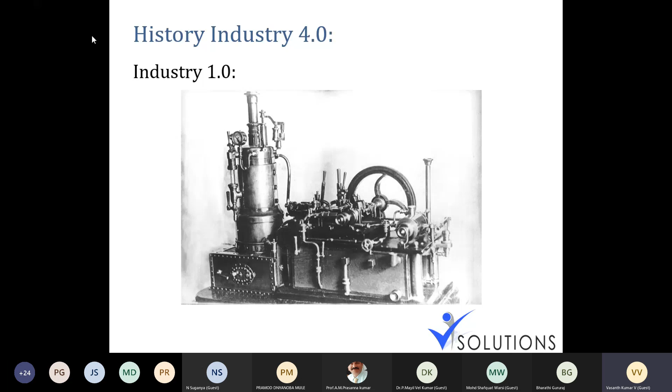That is where our trains came into picture, the coal-based trains. The salient feature of Industrial Revolution 1.0 was marked at the end of the 18th century. It gave the introduction to water and steam powered mechanical models. The highlight was the introduction of steam engine locomotives, the trains basically. Steam engine rails were laid, which helped us to transport items from one place to another.

So the circulation, exports, imports were able to happen. Imports and exports were not happening at a big level till this came into picture. This marked imports and exports happening at a global level. Then came Industrial Revolution 2.0.

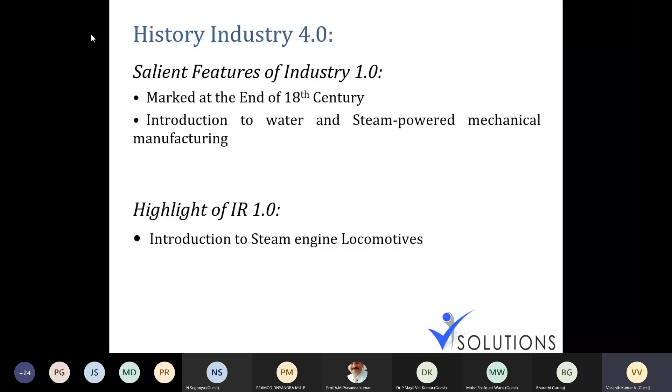This is more or less the same as Industrial Revolution 1.0, but people start doing this in mass production. That's a very important part, where you see the same mechanical models driven by thermal power or steam power or water power, but now n number of people started working on that, with n number of machines put over there. This is where stations came into picture.

There's something called stations when it comes to the production sector. A station is, let's say, you have 5 stations. One particular product, whatever is being designed, tested, or manufactured, will go through every station one by one. It goes through the conveyor belts. That's where conveyor belts also came into picture.

Electricity came into picture. In production, there was mobility of DUTs. DUT is nothing but device under test, or device under production usually. So the device under test started moving from one place to another, basically bringing mobility into the production sector itself.

If you've seen, for example, the olden Charlie Chaplin movies about the Industrial Revolution, you see that the products usually move from one place to another. It undergoes multiple stages of production.

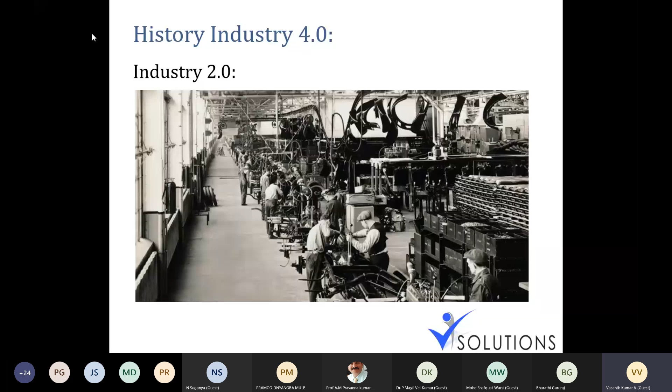The salient feature of Industrial Revolution 2.0 was marked in the 19th century, with the introduction of electricity, mass production, assembly line. Assembly line is nothing but where conveyor belts move the products from one place to another. Telegraph and mobility, as I told you.

And this was basically first introduced in the food production sector, where people in Europe had a very severe climate in the winter seasons. So what they do is preserve their food, like meat. They usually eat more meat.

So they wanted to move this meat from one place to another. When you preserve it, it undergoes a lot of process, so moving them from one place to another was a huge challenge for them. That's where they started doing assembly lines.

Then a gentleman named Henry Ford felt this was a very good idea. Why can't we start using it in automobiles? He carried this principle from the food production sector to the automobile production sector. That's the first time mass production happened in automobile or any manufacturing sector.

The highlight of Industrial Revolution 2.0 was the introduction of electric locomotives, like the normal trains running over cable. It draws power from the cable lying over the top of the rails, or your basic metro rails. In Chennai and Mumbai, it draws power from the overhead lines.

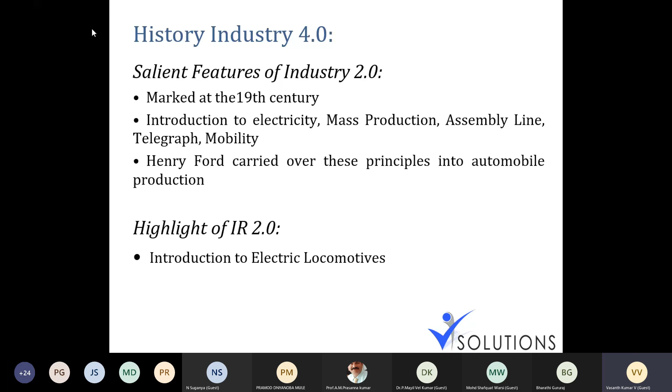Then came Industrial Revolution 3.0. This is where for the very first time people started avoiding people themselves, which means in the production sector they wanted everything done with a robot. That's a very important word, robot. When I say robot, it's nothing but a computer which is driven through software.

Till now no one was using software, it was all a mechanical model. If not, it was powered by human beings' energy or human effort. But for the very first time, software came into picture at Industrial Revolution 3.0.

Whatever you see here, I have a complete video of this image, I'll play that to you. Before that, I have some more things to show you. I'll show that and then come back and show you how it is happening.

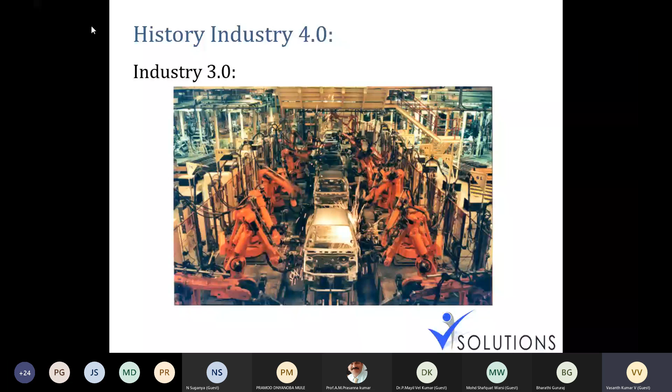This is actually from BMW's production area. The robot they use is from a company called KUKA, KUKA robots are the ones being used. I'll show a demonstration video also to you, I have that.

This was marked in the mid of the 1970s, mid of 20th century, and this is the first time we gave introduction to partial automation. Very important, partial automation. Many people don't know what partial automated or semi-automation means. I'm going to tell you about that.

This gave introduction to partial automation using memory programmable controls and computers, which means you have memories like IC. Basically some IC where you can deploy the program, it's a programmable control, and you can now do partial automation.

Coming back to what partial automation is: you can program your machine to do a set of things, to do that particular set of tasks again and again, but it will not do anything beyond that. It will have a set of codes already lying inside it through IC or some memory, and that particular set of codes will be repeated again and again.

What is fully automated is something that can also try to do something beyond its task, like trying to judge something, estimate something, predict something. These come under a task. A task is doing a given set of data. Something beyond the task will be called fully automation.

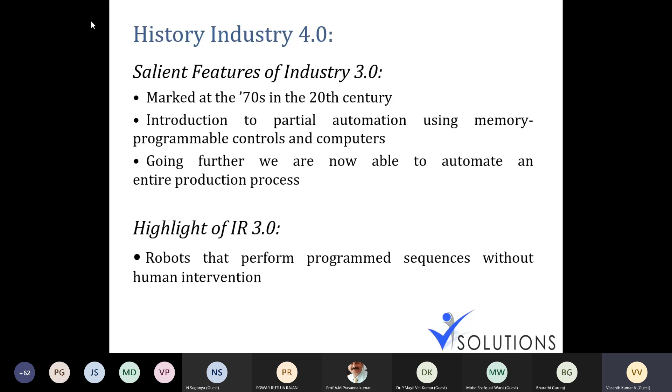A very quick recap of what we saw: Industrial Revolution 1.0 was using steam and water power. Industrial Revolution 2.0 was also using the same, but in mass production - electricity, mobility, steel, and power were being used. So the highlight is that it's an upgrade of 1.0, going from a single machine to an industry level of machines.

Then came 3.0, where electronics and software came into the picture. That's where for the very first time automation came into picture. We were trying to automate everything. There, what happened was we were trying to replace.

If you see in the second picture for Industrial Revolution 2.0, there are many people sitting and working. People don't want that to happen. Rather, they want to use machines to do the task. That is where machines, robots, and programmed software-based applications came into picture. Now it's time for 4.0.

That's what we are trying to do. I already told you 3.0 is an upgrade of 2.0, 2.0 is an upgrade of 1.0, and obviously 4.0 is an upgrade of 3.0 only. So already we have machines, we already have robots, we already have softwares. It is already electronic driven. So what can we do further?

What can we do further to make it better? Ultimately what we're trying to do is make something far better than what it was previously, right? So 4.0 is making 3.0 better, which means the already existing robot has to be at a different level now.

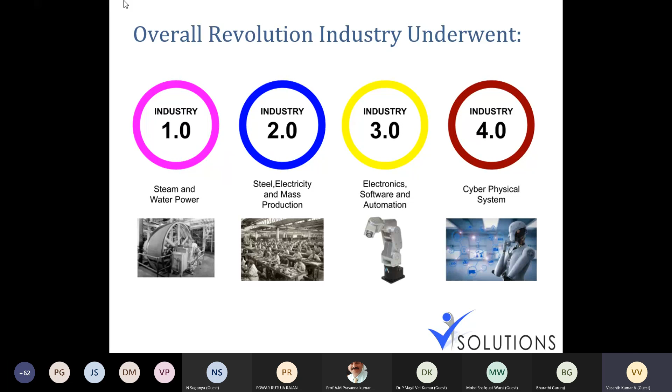Very quickly, I'll tell you what is Industrial Revolution 4.0, what is Industry 4.0. Any industry which falls under this category will be called Industry 4.0 or a smart factory. Very importantly, that is the actual terminology we have. Industry 4.0 is basically a standard. Any company or any factory or any production unit which follows this criteria will be called a smart factory.

As I said, we are currently implementing Industry 4.0, which means we are not sure what is the proper thing. We are currently trying to do this. We are going to come up with a lot of changes. There are a lot of changes that have already happened before, we first came up with a Windows based solution, because in India, most of the companies, and not only companies, most personal individuals are very commonly biased towards Windows, because we all use Windows applications.

Windows 7 we use, Windows XP. Before that, Windows XP we used. 8 was a flop, 8.1 was a flop. Still, we people had no computers, we bought them trusting Windows. Then 10 came into picture. It was slightly better than most of the previous thing, but we preferred and we bought it. Now 11.0 is also coming, but ultimately we will support Windows. That is how the mentality of Indians is when it comes to Windows. We are not comfortable with Mac, and we are not comfortable with Linux.

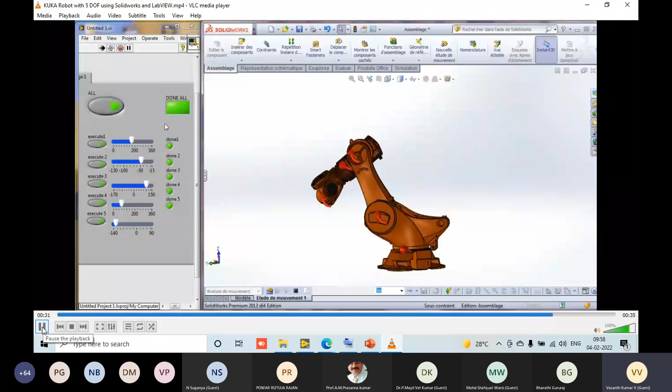Yeah, it was programmed using LabVIEW only, but it was prototyped before. It was very long back where it was prototyped using SolidWorks.

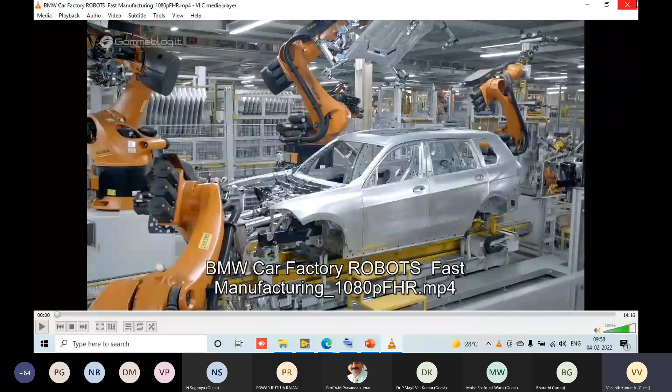I'll show one more video. This is where I wanted to show you how BMW cars use these robots. This is a manufacturing sector of BMW. I showed you a picture, right? That picture was actually taken from the same place. You can see these robots are KUKA robots. Can you see the name here? KUKA. This was designed by KUKA robot. Whatever the demonstration they showed, the promotional video demonstration, it's the same robot.

This is to show you that these are the Industrial Revolution 3.0 following robotic applications where manufacturing was happening.

It uses arc welding, okay.

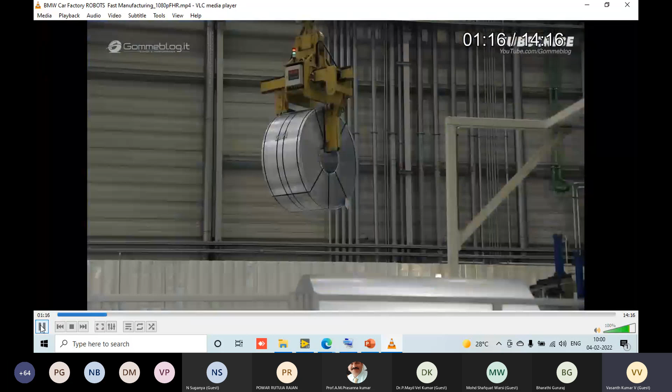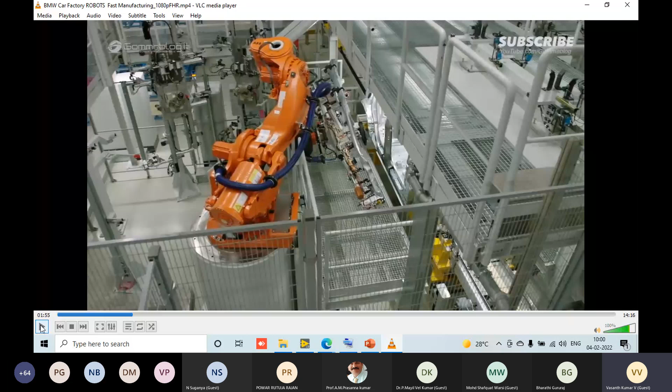This was the actual purpose of this robot. Okay, this was the actual purpose of this robot. Now these robots, we are trying to turn into full automation. So I'll just show one more case study to you people where these same type of robots, in a company called Airbus, basically they have done it. I'll just show you that. Just give me a minute, I'm just seeing which video.

Okay, this is different. I have a report for that. I'll just show that report.

We've just seen a great example of how our customers add their domain expertise on top of our platform to create complicated test systems. But there are also times that you may want to take advantage of the deep expertise of one of our alliance partners to ensure your success. To tell us more about how they're helping their customers make the smart factory a reality, please welcome to the stage from NI Alliance Partner GSystems, Dave Baker and James Duvall.

Hey guys. Yep. Dave, James, good to see you all this morning. Thanks for joining us. All right, Dave, let's start with you.

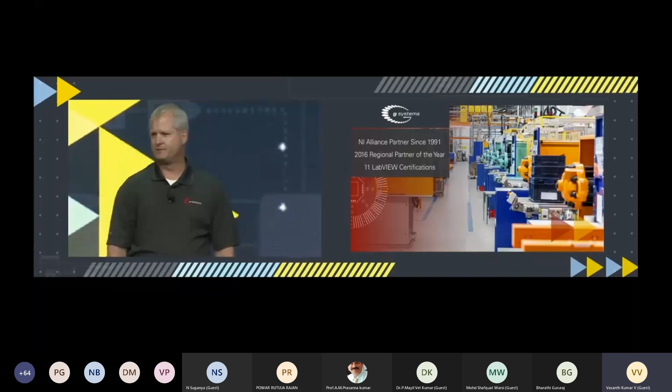Tell us about GSystems. Thanks, Chad. Well, GSystems is an NI Alliance partner, as you heard. We've been providing solutions built on the NI product platform for over 25 years. We design and build test systems, anything ranging from a small embedded system all the way up to a high channel count ATE. And we're excited to be here today to talk to you about the demand for factory test solutions.

All right, we're glad to have you as well. And it looks like you brought a demonstration with y'all. Right, so this is an example of a system that we're putting together for customers who increasingly are using robotics and automation and data-driven decision-making in their manufacturing process. Now, many of these customers have multiple lines that they're trying to manage. They're scattered across many sites, so collecting data, the status of those test systems can be very challenging. What they really need is a smart test solution that supports their smart factory.

All right, that sounds good. So James, can you help us understand some of the challenges that an operator may face in a production environment that you're trying to help address? Yes, in fact, I think we have a video that should shed some light on this.

So suppose you're an operator and you are monitoring a test system on a production assembly line. Now, what happens when something goes a little bit wrong? What happens when something goes a lot bit wrong? It slows everything down, and you can't actually leave your station while things are underway. And never underestimate the creativity of an operator who is trying to keep the line rolling. All right, well, whether or not you're familiar with the classic show I Love Lucy, Lucy's environment isn't exactly a high-tech production environment, but her humor helps us relate to the challenges an operator may face when things start going wrong on the line and they begin to fall behind.

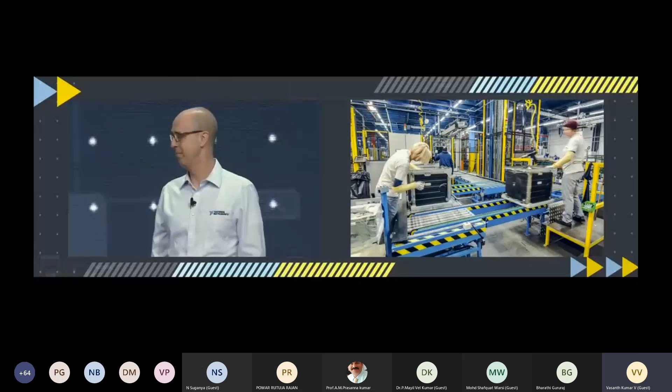Right, so production lines are having to increasingly increase their output, reduce their downtime of their test systems, and rely on data. And to be successful, that data needs to be timely and up to date. So what we're doing is putting together smart solutions that enable them to have a network-based dashboard view of their production line status, and also some capability of managing those test systems. All right, so help us get a sense for how NI is helping you make that a reality.

Sure. For this system, we've standardized on Compact RIO, LabVIEW, and SystemLink. We've developed a LabVIEW real-time application to capture and process measurements. We're also using SystemLink for remote management and system monitoring. GSystems has designed and assembled a custom enclosure for the C-RIO, complete with a high-visibility stoplight indicator, so we can see the status of the test. We got one running here and another one in the expo hall at our booth.

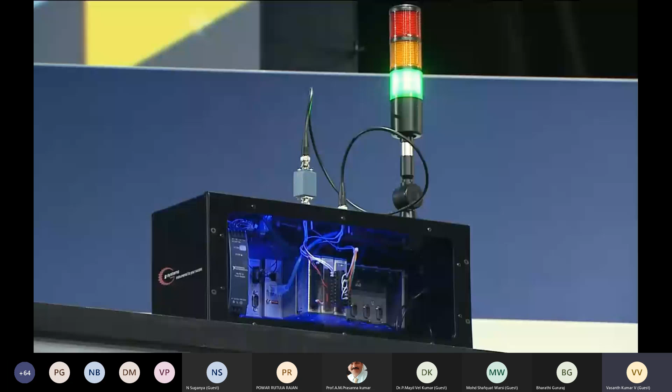All right, so you're taking advantage of LabVIEW and Compact RIO as well as SystemLink. And SystemLink is a great example of our increased platform investment to make it easier for you to manage remote and distributed systems. Let's take a look at what it has to offer.

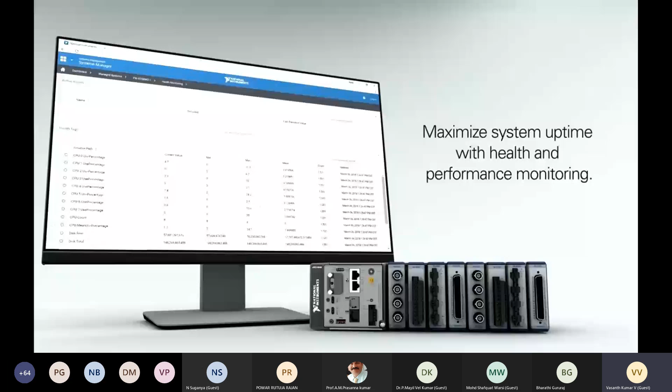All right, catchy music. As we saw in the video, SystemLink works with your existing LabVIEW environment. It also comes with a central web application for remote management and system monitoring. I'm going to show you a little bit about how it works. So this is our little test station here. We've got a little test article here. And when I push the button, this is a good one. So we should pass. Oh, good.

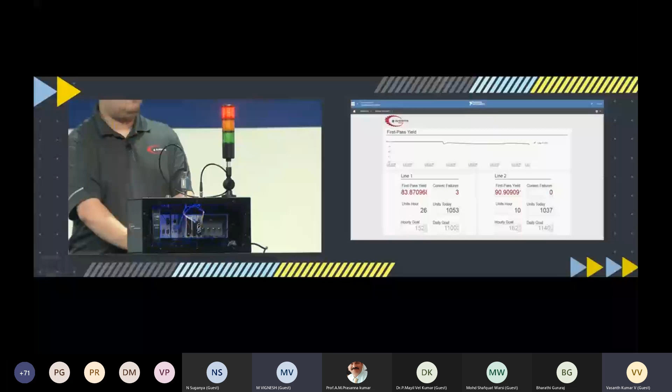We get 3 red lights in a row, that's going to cause an alarm. Oh wait, that's me, I'm over here blowing up this morning. Yep, sure enough, SystemLink just sent me a text message saying that we have a problem, which is pretty cool. Haven't we been able to do something like this with LabVIEW for a while?

That's right, Chad, but here with SystemLink, we're able to configure new alarms without having to do any additional programming. In this case, SystemLink was configured to throw a new alarm whenever we had 3 failures in a row. This would prompt us to get on the SystemLink dashboards, which will give us a quick view of the status of the line.

All right, so we're making it easier to take advantage of capabilities like this, but my real question is if SystemLink can help us bring the station back online from a remote location. Absolutely. Normally, we would have to basically dispatch a technician out to look for problems in the workflow. In this case, however, we've got a new UUT, and we can use SystemLink's remote deployment feature to put a new version of the software out to go ahead and fix the tester up.

So I'm going to run this again with some new software on it. There's a green light. All right, so once the system's been updated, the software can verify the functionality that the test station is back online. This rapid notification of production line status and the ability to remotely configure it is really critical for meeting our daily production targets in a production environment.

All right, so we're essentially catching and correcting small issues before they become major catastrophes, which I know is a goal of many of you in the audience today. It's also great to see how you can take advantage of the domain expertise of NI Alliance partners like GSystems to ensure your success. Right, Chad.

So NI's product platform is crucial for GSystems' success as well as the success of our customers. We're striving to not only meet today's requirements, but to prepare our customers for the future for additional challenges of increasing their production rate, reducing their test station downtime, and providing decision-making support.

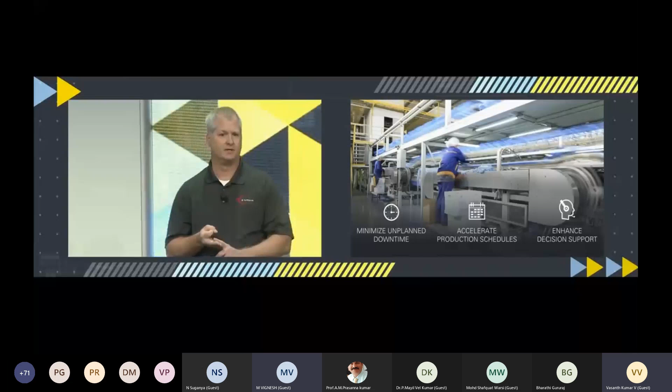Oh, that's me again. Let's check, see what it tells us. SystemLink has given us a notification that it's time to wrap up so that we don't fall behind on our keynote. Thanks for joining us this morning. Thank you very much. Good luck with your factory applications.

Okay, this was a demonstration where they were trying to show that in a production line, if the operator experienced some downtime or any failures on the machine level, what can be done. Basically this is what is called health monitoring, where the information is always gathered, and if there is a continuous 3 fails from a machine, it means there's some problem with the machine, maybe not with the DUTs being tested, and that information is carried through SystemLink.

What happens is SystemLink carries the data powered by LabVIEW, basically takes it to the main center, and all the information also goes through to a phone, to the programmer or to the base station helper who can eradicate this problem. And from there, from the base station, you can take control over the machine and try to sort the issues. This is one of the different ways people are trying to make this entire production system smarter.

Everyone is coming up with different methodologies to understand how to make smart factories an even better, efficient place to work. Ultimately, what they're trying to do is come up with solutions to eradicate downtime, especially unplanned downtime. They want to accelerate production in case of any emergency, and if downtime happens, figure out how to handle it.

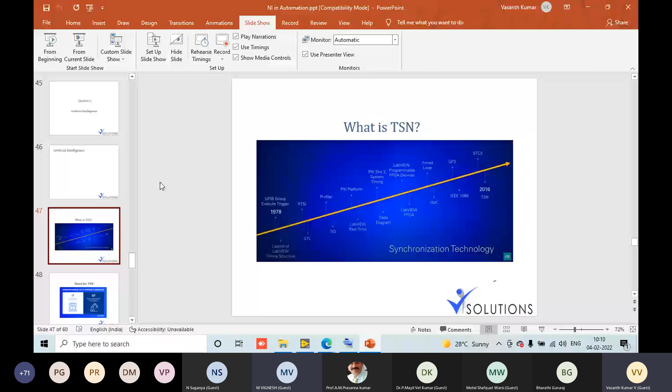Time sensitive network. This is because currently there isn't a proper solution about network usage. We are still using the same www, transferring all data and information through the same protocol that people use to communicate. That's where we have to be more careful about how we use the systems.

Now just imagine a network that we normally use for normal applications - let's say downloading software, installing something, or streaming a YouTube video. Parallelly, there's a production sector running on the same floor, sharing the same network. Let me talk you through this case scenario, this case study, and how to handle it.

There is an important control unit, like the system I demonstrated, where important production is happening. If there is downtime, this information has to go to the main remote base station, and from there a control action has to be taken. This is a very critical application, because the error or downtime might even hurt the machine - it could break if we keep running it.

Right now, the problem is both are happening at the same time, because I'm watching a YouTube video which is not as important compared to that emergency call from the production machine. So now I need to understand which application is more important to transfer, because there's a huge amount of traffic. I'm just giving a simple example - think about a huge number of machines involved. In one production sector there can be hundreds of machines, with more people employed and even more devices connected.

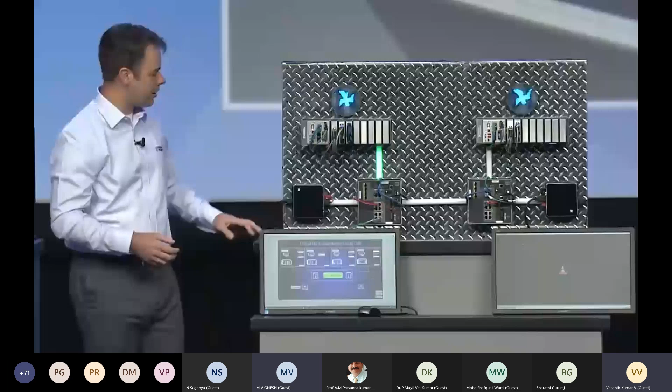Yeah, well, right now there is no problem, but what comes in is this issue of convergence. So when we want to put this and mix it with our standard IT infrastructure, we're going to have other data flows, not just our green flow right now. So let me do what would be very common in an IT network. We'll add some additional traffic. In this case, I'm going to stream some video from this computer to that computer through this same link.

Yeah, we can see that the video traffic is actually causing problems for the control system. Maybe we better shut that off, Todd. What's happening is that the video traffic is causing some of the control frames to be delayed past their deadline, and actually some of the frames are being dropped entirely. Now if this had been a real working machine, this would have caused potentially damage to the machine and certainly would have damaged the parts that it was making.

So historically, this is why OT and IT networks have been kept separate. Yeah, exactly. And we've been working on a way to converge it. So let me show you that technology as well. I'm going to clear these faults and I'm going to switch modes now. Now I'm running in a TSN mode where this blue traffic is using these new capabilities. And now when I add the streaming traffic...

All right, so what we see here now is we have the video data being streamed across the network right alongside our controls traffic. The controls traffic is going through undisturbed from one CompactRIO to the other, and we're saturating the remaining network with this video data. And it looks like it's working great. Paul, how does all this work?

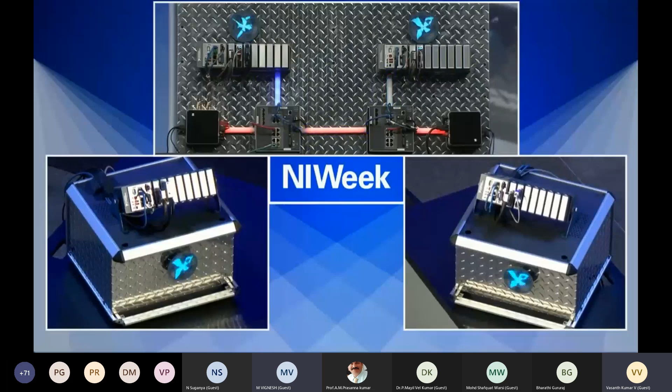The foundation of this converged network technology is time-sensitive networking, or TSN, an evolution of Ethernet standards created by the IEEE 802 Standards Committee. NI, Intel, Cisco, and others have been collaborating to enhance Ethernet with deterministic operations that are required by the OT system. That's right, the team has been really enhancing networking so that the time performance is improved dramatically.

And we're doing this by adding three main capabilities. The first is precise time synchronization, accomplished through a standard called IEEE 802.1AS, based on 1588, the precision time protocol that's been around for about 10 years. Next, we combine time synchronization with traffic management to deliver latency guarantees. Each switch identifies the time-critical data and places it in a special queue. The switch then forwards each of these packets at very specific times.

What this does is create a network flow, or a virtual wire, between the talkers and the listeners across the entire network. And the third element for this is system configuration. We're taking a page out of software-defined networking to abstract the network configuration from the end application configuration.

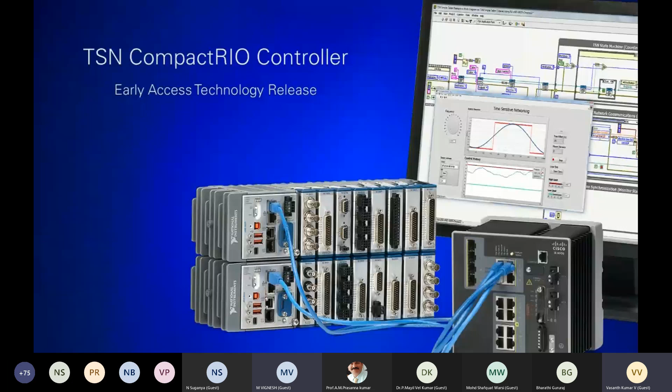Well, Kevin, Paul, it's been great working with you on this project. So what was the demonstration here? I'll just quickly try to recap it. They had proper data transmitted in a normal mode, and also there is a second network on this same network. There was a second streaming of video.

So when both were happening together, the IT and OT, when they converge together, what happens is you'll come across data loss, data trafficking - all these things will come into picture. That is where TSN was demonstrated.

They showed you, they were explaining how TSN was working, how Intel, LabVIEW, or NI technology, along with Cisco, how they were trying to make it happen, how they were trying to demonstrate it.

With that, you'll see that both get transmitted, and not only two. Basically, the idea of TSN is not only two networks or two transmissions in one network. It can have n number of transmissions in a single network without data trafficking. Okay, that's a very important part.

Ultimately, the idea is they try to convert the data into bits, and they try to send the data in bits, collect it there, and try to assemble them all back together. So what happens is all data are merged together - smudged together, not even merged. They are smudged together, and they'll be reverting it back.

So this was one of the interesting technologies where they wanted to make it more smart. Depending upon understanding which is more prioritized, which has to be stopped, it can also do trafficking as said. Depending upon the priority, if you can set the priority there in the TSN, you can also understand that this particular transmission is not needed, and it will totally stop it, and other systems will be properly trafficked - properly synchronized. So that is also possible. This is one more way of making a smart system.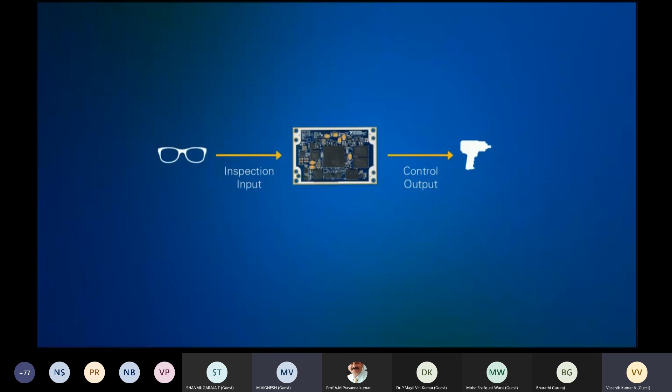On the production floor today, you'd be using one of a thousand different tools to get the job done. But now, because of this tight coupling between wearable intelligence devices and smart custom tools, technicians simply have to place the tool in the correct location, and the system will identify what particular job it is, apply the correct amount of torque, and log the entire process to a quality assurance database.

At this point, most of the audience will be wondering how Airbus protects this, since they're clearly not wearing a CompactRIO. The team here would have been wearing one because they began their development with the CompactRIO. But when Airbus came to NI and told us about their plans for wearable intelligence, we agreed that their application was a good fit for the new NI system on module.

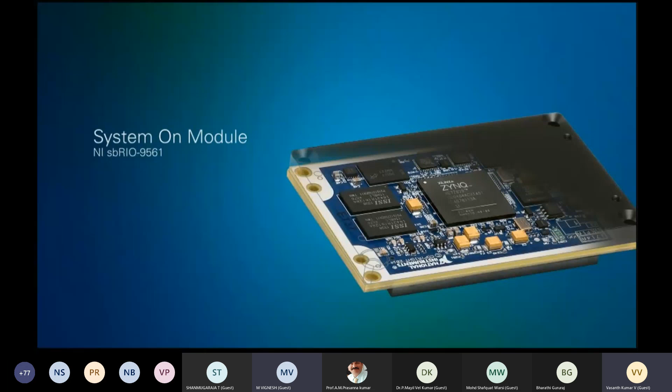The system on module is the smallest ever implementation of the LabVIEW RIO architecture. As you can see, it's the same size as a credit card, making it ideal for low physical footprint applications and high volume deployment. The LabVIEW RIO architecture has a key advantage: no matter what form factor you're on, you can use the same software and same IP, which is exactly what Airbus has done to minimize their changeover time to the software platform.

Sure. So as I said, we have neither the plane nor the tools here today. But what we can do is take the video we saw before and feed that directly into the SOM, where it will carry out the onboard image processing. Then, rather than sending commands to the tool, which would be dangerous, we send those commands to a small interface here. So Rick, if you'd look at this display, we'll get a demonstration.

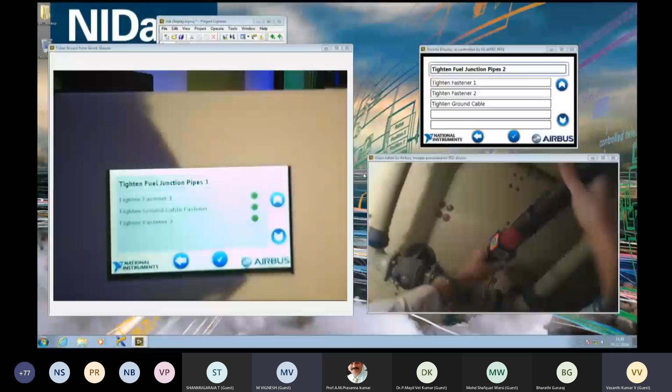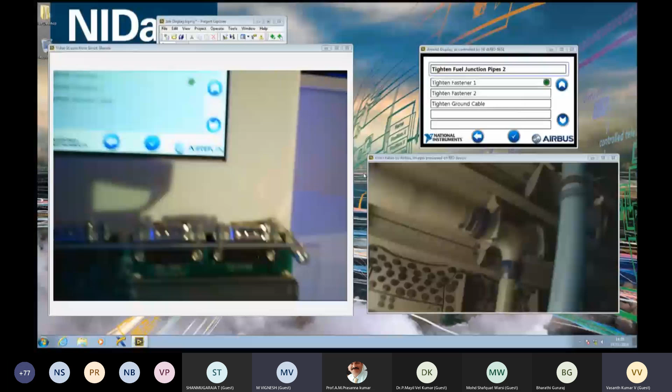Now Joel, obviously I'm very interested about this.

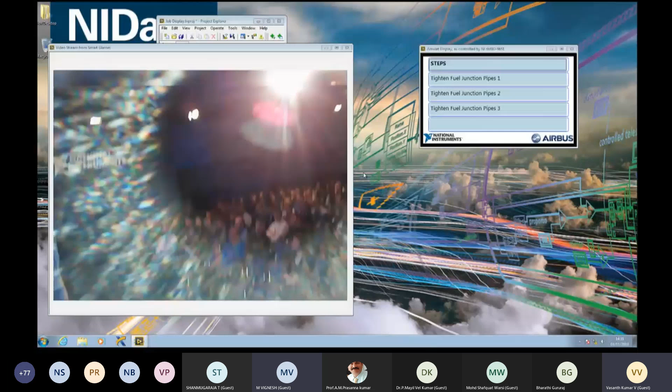Yeah, of course. So Airbus have a plan called the Open Robot Interface. In their manufacturing operations, they utilize robots from companies like ABB, KUKA, and others. They want to integrate these robots with their new smart tooling technology. To do this, they'll have to scale their robotics application software across all their systems.

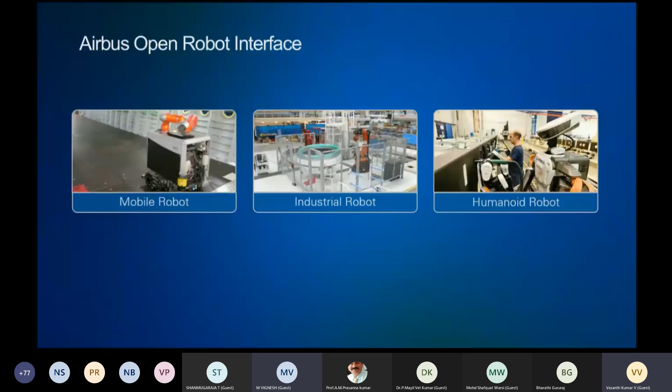Operationally, they're going to do this by using the CompactRIO to supplement their existing industrial controls. In addition, they're leveraging code from the Linux community, software and robot developers themselves, and their other factory-of-the-future designs. The factory of the future is a huge, ambitious vision the team is now making rapid progress on. Ever since they adopted a platform-based approach using the LabVIEW RIO architecture, the team has simply been more productive. Compared to other approaches they tried, there's been a 10x reduction in development time.

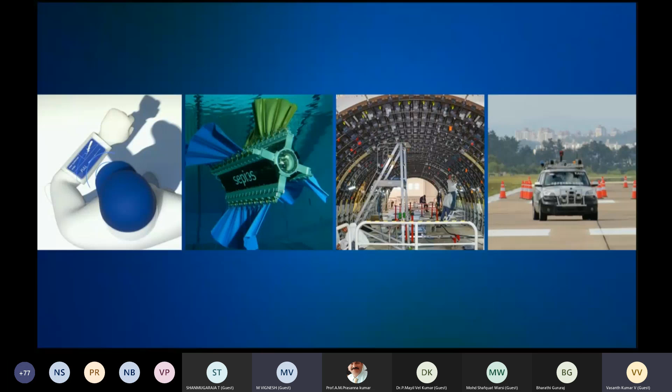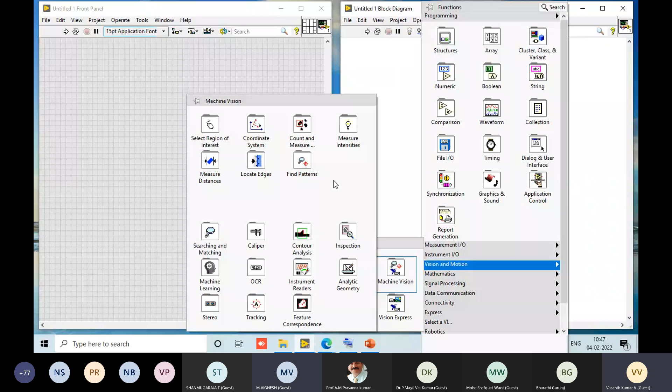For the basic things I needed, I've just installed it. You can see here there's something called machine learning. On the 5th row — wait, the 3rd row is completely empty. 1st row, 2nd row, 3rd row, 4th row, 5th row — the first one, you can see machine learning. Inside that you have deep learning training also, how to set the input model and other things will be there. So for machine learning, you have some classification techniques, how you can do the classification.

I have a simple example which I've made. I'll quickly tell you what that example is basically doing. First, I'll open this Excel sheet. This Excel sheet has some preloaded set of data — these are the data or the neighbors which I'm going to use for the prediction now. Neighbors are nothing but, usually, this information gets plotted on a graph, where the data will be scattered, and if you're predicting some value, it will check the nearest value which you have fed here.

So you can see here, for my heart pulse measurement, for this value there are two conditions — one is abnormal and one is normal. One is abnormal, zero is normal.

Anything around the range of 70 to 79 will be considered normal. Lower values like 60, 65, 66, 63 will be considered abnormal. Beyond 79 plus will once again be considered abnormal.

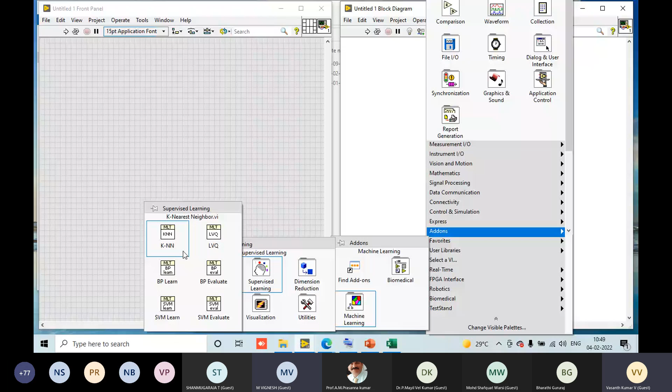In LabVIEW, as I told you, right click, add-on, machine learning. Here you will see that in the supervised technique you have k nearest neighbor. KNN is k nearest neighbor.

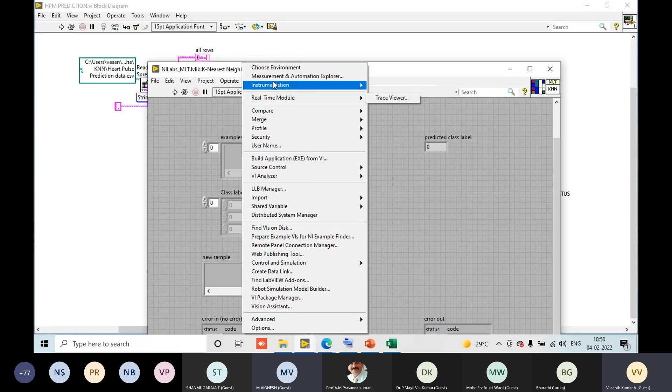I've done the code already, I'll just open this. So here, can you see, this is nothing but KNN, which is the same replication of this. Whatever is in the KNN application, I'll show the block diagram, so whatever is done there is replicated the same way. Here I've just loaded that particular CSV file, the Excel sheet I've loaded here. The data are obtained here, and from there I'm extracting the data and performing the KNN.

The K value I've just left as 3. So 3 is how many neighbors you have to consider to come to a conclusion, how many neighbors you have to consult to come to a prediction. That prediction means for a new sample data, based on the data mentioned here, if I say 100, it should say it's normal or abnormal.

It has to predict the value as normal or abnormal using the pre-existing information. So this k value should always try to be a positive number, and number two, it has to be an odd number. The reason for an odd number is, you have two classification values, normal and abnormal.

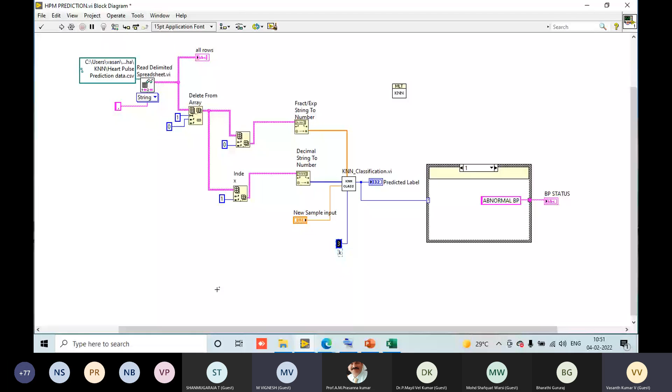If you go for an even number, there's a chance that, let's say k value was 6, then 3 neighbors might be class number 1 and 3 neighbors could be class number 2. So to make it more reliable, make sure the value is an odd number, and always, if the number of cases is 2, go for a k value higher than the number of cases. There are 2 cases here, so go for 3 or 5 or 7, something like that, as the k value.

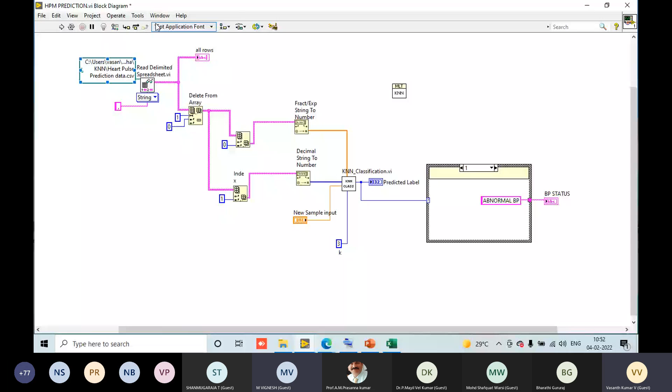These are the common criteria you have to follow to make this work. Now I'm going to give the new sample value, I don't know, I'll randomly give somewhere around 76. It can be a fraction number also, so I can give a fraction number too.

So here this has to be predicted, the output should be predicted here. The predicted label should be 0 or 1 - in the Excel sheet that is the label. And the status is here, normal or abnormal will come here.

So when I run this program, you can see that the Excel information is read here. The external data can be a normal Excel sheet, a document, or a text sheet, it can be anything. From here I read it.

So that data will be read here, and here it is predicted to be normal. 76, because based on the nearest values, the nearest value somewhere like 76.8 is the nearest. 76 is the nearest value. These are the two nearest values you have. One more nearest value will be somewhere around 72 maybe.

So now I'll go for some value, like 76 maybe. Okay, 76 is already existing. I'll go for 65. I think 65 is not here. When I run this, the nearest value of 65 in this sheet, it is clearly mentioned that it is abnormal data. I'll just go for a higher value, like 100. The nearest value will once again predict it to be abnormal. Somewhere this is designed such that around 72, I believe 72 is not there. 72.5 is there, but 72 value is not there. So when I run it, you can see it is normal.

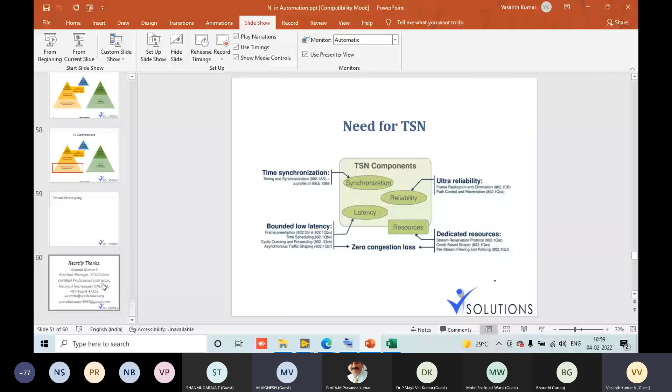One more thing I wanted to say about this. I totally forgot, but thankfully my slide helped me show you. See, NI is National Instruments. Currently they worked on all domains before.

Now they are streamlining into some sectors where there is a chance of IoT, 5G research, and all these IoT-based applications and smart systems will be involved. So if you see semiconductors, automotive, aerospace, defense, and wireless for the 5G sector, wide area networks and other things they are trying to do. Apart from that, energy management like battery management systems, smart grid analysis, microgrid analysis - all these things is what NI is basically concentrating on.

So what they're trying to invest in - if you see image processing applications, there is not much going to be NI's involvement in image processing related applications. They already have some, but they're not going to invest their capital cost in development of toolkits or products much into that. The reason is they don't see much scope already.

Where they see the scope is aerospace, where flight testing comes into picture. It is always evergreen - there will always be war as long as the earth exists, as long as human beings are alive, somewhere people will be fighting and there will be some war. Defense is always needed, so NI decided to support that.